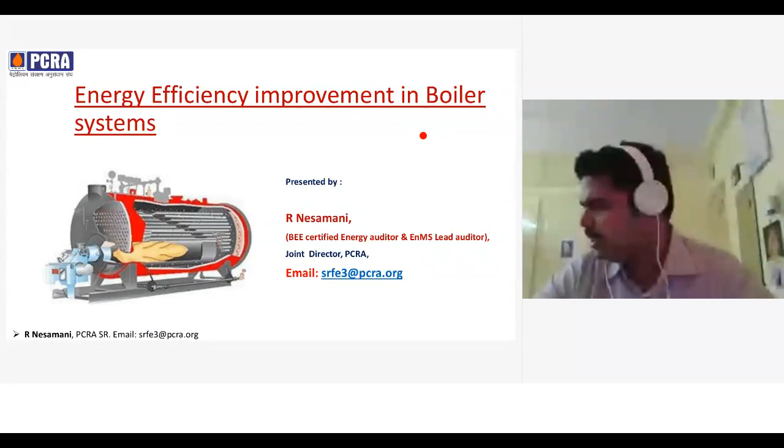So this is, I hope my screen is visible fully. Yes, sir, we can see your slide. Okay, thank you, sir. I have given an introduction about myself. I'm Nesamani, Joint Director in PCRA Chennai. We'll move on to the next slide.

This is the flow of the webinar. It will be like introduction of PCRA, we'll see about the boiler and its types, boiler system energy audit, what is the approach and what are the tools we will be using for audit, performance assessment of boiler systems and losses, factors affecting the boiler efficiency, and the energy efficiency improvements action plans with case studies.

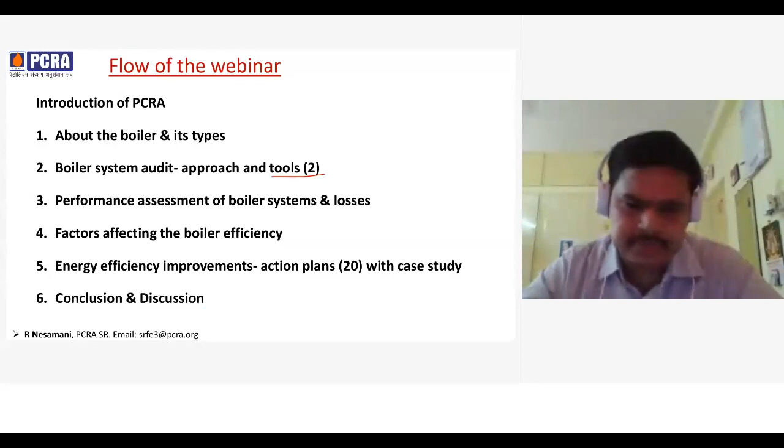This is the flow of the introduction about PCRA. Our vision is to become a center of excellence for energy conservation.

Actions towards achieving our vision include conducting trainings to industries on energy conservation techniques, and we have been conducting energy audits for industries at all levels, starting from PAT audits for designated consumers to MSME audits. We have been conducting audits.

We have conducted more than 10,000 energy audits till date, and we provide consultancy to implement energy management system ISO 50001 for industries to keep continual improvement in energy performance.

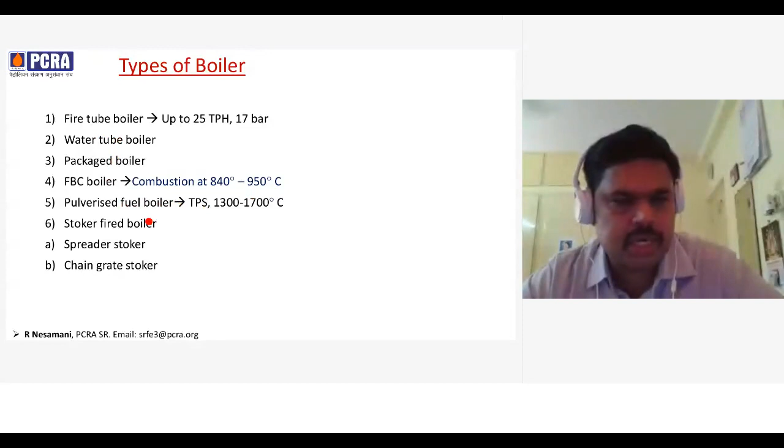Types of boiler - we have various types of boiler as per its pressure and applications. We have many types like fire tube boiler and water tube boiler, packaged boiler, FBC, and pulverized fuel boiler, which is mostly used in thermal power plants at high temperatures. And stoker fired boiler has two types, spreader stoker and chain grate stoker.

So the second topic is how to do an energy audit of a boiler system - what is the approach and what are the tools we will be using during the audit.

The audit approach is: first, if you go to any industry, we have to calculate the thermal baseline for the plant or industry, in terms of specific energy consumption - how much thermal energy they are using to produce 1 metric ton of the product output. That we have to calculate and find, so that will be the baseline specific energy consumption.

After that, we have to compare that baseline with the benchmark baseline for the applicable industry or process wise.

For example, let's take a rice mill. There may be having some 1000 kilocalories per metric ton of rice product. So that we have to compare with other industries, so that we can know what is our status - whether we are lagging or if there is any scope of improvement. That we have to find out.

Third, we have to study the existing energy consumption pattern, to find the avoidable energy losses in the boiler and steam systems. Fourth, as per the findings, we have to list down the action plans to improve the SEC.

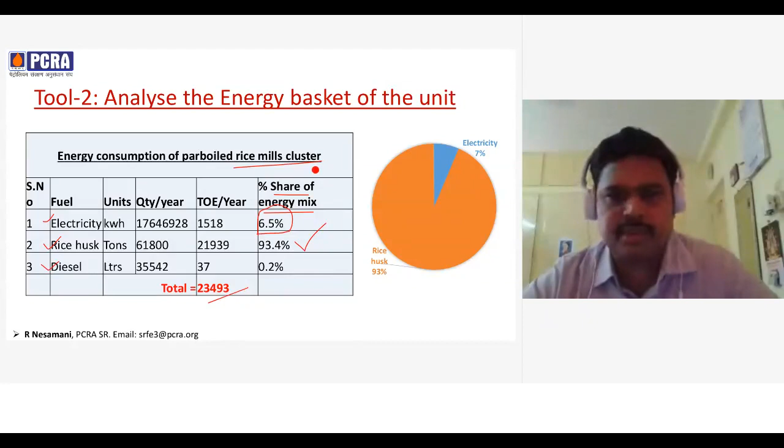The energy manager of the plant, his main concern shall be to improve the overall efficiency so that the fuel cost, consumption cost comes down, and specific energy consumption comes down.

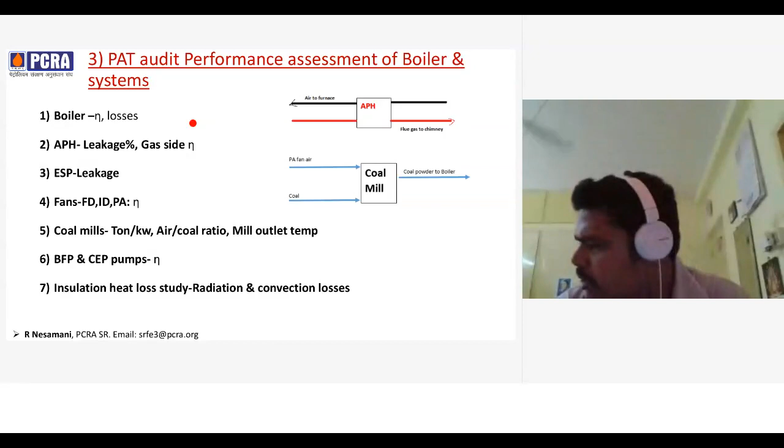If I am going too fast, or if I am not audible, Sarath, please call me or announce me, okay? There was a suggestion from a participant asking if you could please slow down a little bit. Sure, that's what I also felt.

So third is PAT audit - performance assessment of boilers and systems. This is a simple introduction. We'll briefly elaborate on how to do a performance assessment of boilers in case of PAT audit; normally we've been doing the same thing. What are the things we'll be doing relevant to boiler systems? For the main boiler, efficiency calculation and finding its losses - I will explain later. For the air preheater, we have to find leakage percentage and gas side efficiency. So how do we do this?

This is an APH (air preheater). Flue gas enters one side and exits to the chimney. On one side, air is entering and taking heat from the flue gas, then exiting, going to the furnace. We have to note down the oxygen percentage in the flue gas before and after the APH. If the oxygen percentage has increased between these 2 points, it means some air has entered the flue gas path from the airline. Why does this happen? Because the airline is at high pressure, and this line is in vacuum, meaning lesser pressure. Because of that, and also due to various reasons like seals damaging and other reasons, leakage happens. We have to calculate that leakage percentage using a formula: O2 percentage divided by 21 minus O2. That is the formula we have to use.

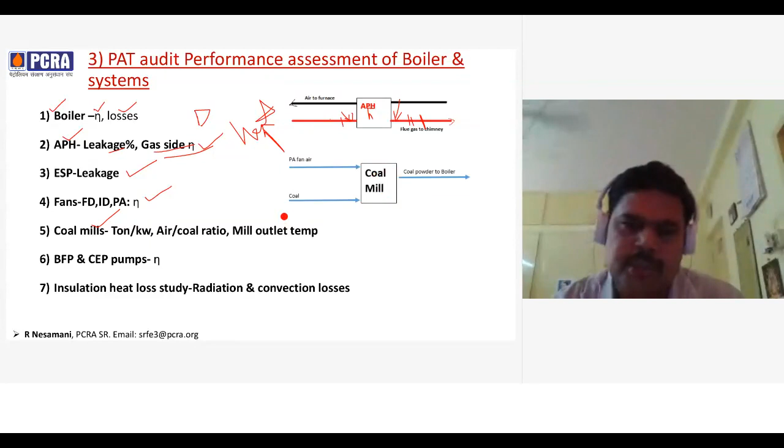For coal mills, we have to find — this is a coal mill. Air is supplied to the coal mill to carry the coal powder. The coal is supplied to the coal mill and crushed so that coal powder forms. That coal powder goes to the boiler. This is the simple process of a coal mill.

What we have to find is how much ton of coal is transported per unit of energy consumption — how much power the coal mill consumes per ton of coal. Second is the air-coal ratio: how much air is required to transport 1 unit of coal. That we have to find out.

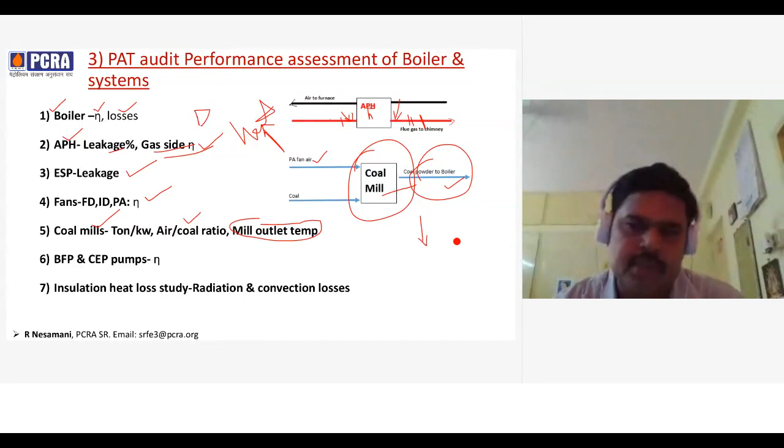Third important point is coal mill temperature. The temperature at the exit of the coal mill needs to be monitored regularly, because if it reduces, we are sending colder air to the boiler furnace, thereby the heat rate will increase and the efficiency will come down. So we need to keep an eye on coal outlet temperature and keep it as per the design temperature.

Sixth point is about boiler feed pump and condensate extraction pump efficiency, because this plays a major role in boiler system audit. Seventh is insulation heat loss study. Because of lack of insulation in boiler and steam piping surfaces, there will be radiation and convection losses that we have to study using a thermal imager. We will see these one by one.

So what is the procedure to evaluate boiler efficiency? One is the direct method and second is the indirect method.

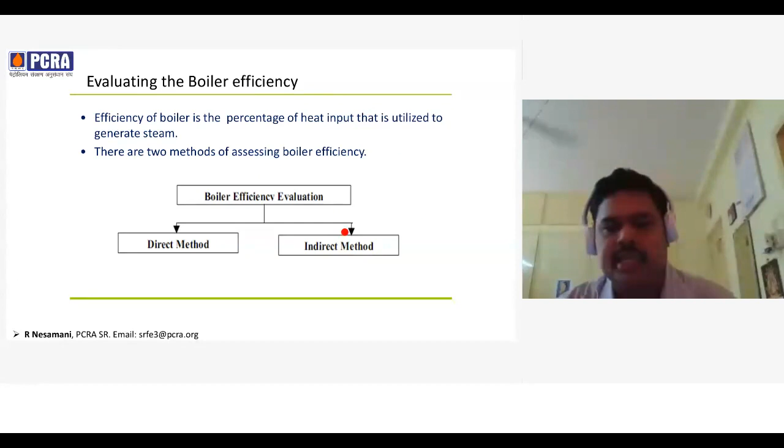Direct method is output divided by input. Input is given in the form of fuel, so mass flow rate multiplied by GCV will give the input to the boiler. The output is steam — steam's enthalpy minus enthalpy of the feed water, which will give the output. This will give the efficiency of the boiler unit.

But the problem with this method is even a small error in any measurement will end up with a high deviation in efficiency calculation. Because of that, we don't use this direct method. We normally use, as per the standard PTC 4.0, it is mandated to use an indirect method, that is a heat loss method. We'll see that.

This is for the boiler — fuel and air is given as input and flue gas is going out to the chimney. What are the losses? One is dry flue gas loss, hydrogen loss, moisture in fuel loss, and moisture in air loss. This is because hydrogen combines with oxygen to form water. That water, along with this moisture, will get heat of combustion from inside the boiler and get converted to water vapor. So it consumes energy from the furnace, absorbing energy and wasting useful heat.

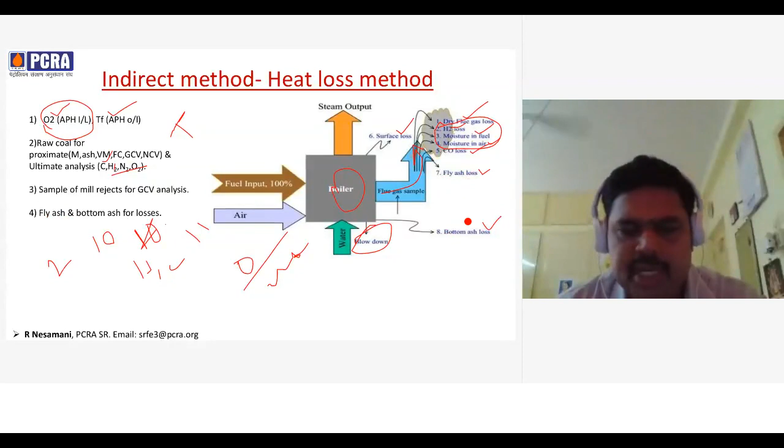From that, we have to calculate how much flue gas is also flowing, mass flow rate of the flue gas. That we will be using in the formula. And we have to take raw coal for proximate analysis. From proximate analysis using formulas, we will calculate ultimate analysis, meaning how much carbon, hydrogen is available in the fuel. Third is a sample of coal mill rejects for GCV analysis, so that we can find the loss due to coal rejection. And fourth is fly ash and bottom ash losses. We have to collect the sample and measure the GCV. Thereby, we will find how much energy is lost in ash.

So one point of concern is that in flue gases, which data need to be taken - oxygen or CO2? Using CO2 also you can find the excess air, but it is preferable to take an oxygen reading. The reason is that flue gas contains oxygen, CO2, carbon monoxide in very ppm level, and SO2. But if you see the correlation between oxygen and excess air, as the excess air increases, oxygen also increases proportionally. But in case of CO2, as the excess air increases, the CO2 is reducing, not exactly proportionally - a little deviation is there. For example, for LDO, if excess air is increased from 2 to 10%, it causes O2 in flue gas to increase by a factor of 5. But the CO2 drops by only 10%. So because of that, it is preferable to use an O2 reading for finding excess air. Also oxygen percentage is less sensitive to variations in the chemical compounds of the fuel, but CO2 in the flue gases depends on the carbon percentage in the fuel. So O2 is not affected by the carbon content in the fuel. Because of these reasons, we prefer to take an oxygen reading to find the excess air.

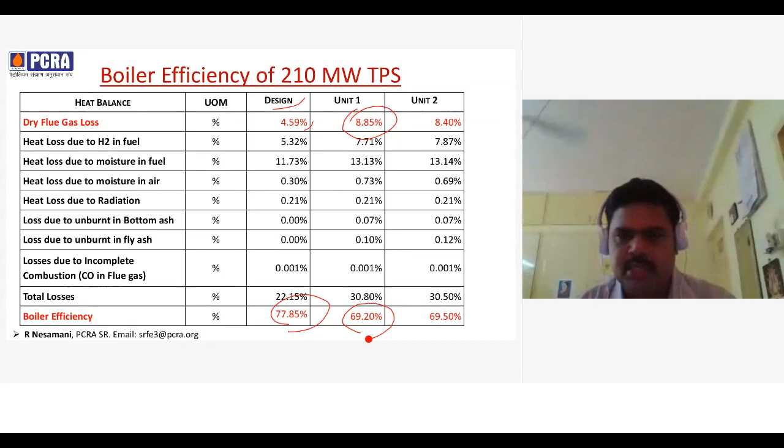So we'll discuss the losses in detail. The first loss is dry flue gas loss. The causes are high excess air and high flue gas temperature, meaning stack temperature.

First we'll look at high excess air. We've discussed using an oxygen measurement in the flue gas using this formula, which we'll calculate. There's a typo error, so it should be O2%.

First we have to find the theoretical air, that is the stoichiometric air. For example, for coal, 10.7 kg of air is required per 1 kg of fuel. This will vary as per the various types of coal and their specifications of carbon and hydrogen content. But even if you supply this optimum air, is it enough?

No, it's not enough, because inside the furnace, complete combustion cannot happen this way. Each carbon particle will not mix with an oxygen particle exactly. So we need to supply a little bit of excess air so that complete combustion takes place.

So we have to find the optimum excess air levels for each fuel. For example, for coal, the optimum excess air is 15 to 20%. This means if you supply almost 12 kg of air per 1 kg of fuel, it will give very good combustion. Now let's look at this drawing which we discussed.

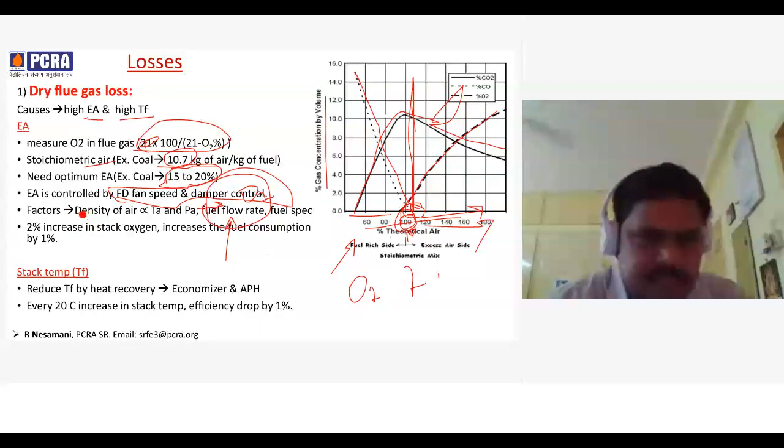If you see, the factors which affect excess air include air density, and temperature of air is inversely proportional to density. If the temperature of air increases, the density will reduce. If we do the boiler tuning at 6 a.m. in the morning for the evening, what happens?

Temperature will increase, density will come down, so the airflow will come down. So it will go into this zone, a lack-of-combustion zone. This will have a big effect on boiler efficiency.

Other factors like fuel flow rate and fuel specification will also affect this, because if the fuel flow rate varies, we need to supply more or less air. Fuel specification also affects excess air requirements. A 2% increase in stack oxygen increases fuel consumption by 1%.

So we have to be very careful in finding and setting the excess air. The second reason for dry flue gas loss is stack temperature.

If you reduce the stack temperature by using heat recovery options like an economizer and APH, the efficiency of the system will increase. We will see in detail how every 20 degree Celsius increase in stack temperature will drop efficiency by 1%.

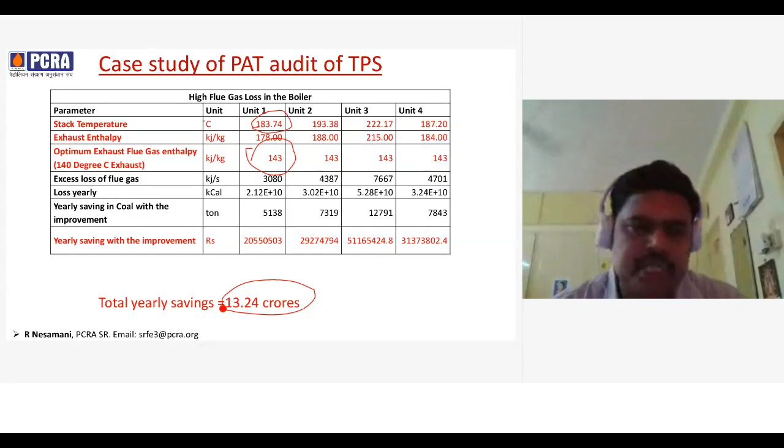Second is hydrogen loss or enthalpy loss. The causes are hydrogen in fuel, moisture in fuel, and moisture in supplied air. Hydrogen in fuel mixes with oxygen to form water, and that water along with moisture takes heat of combustion to form steam, which is a loss. Hydrogen is very high in natural gas, so this loss is normally very high when using natural gas as fuel. It is almost 11% for natural gas and 7% for fuel oil.

So how to prevent this loss? We can control the flue gas temperature, but it will have a very small effect on this loss. Another method is using a condensing heat exchanger, that means a condensing economizer, which can reduce this loss appreciably.

Third is unburnt loss. This is because of lack of combustion or lack of oxygen, where carbon mixes with oxygen to form carbon monoxide, which releases lesser energy than the actual energy. The reasons include high primary air flow, fuel size, and low air supply.

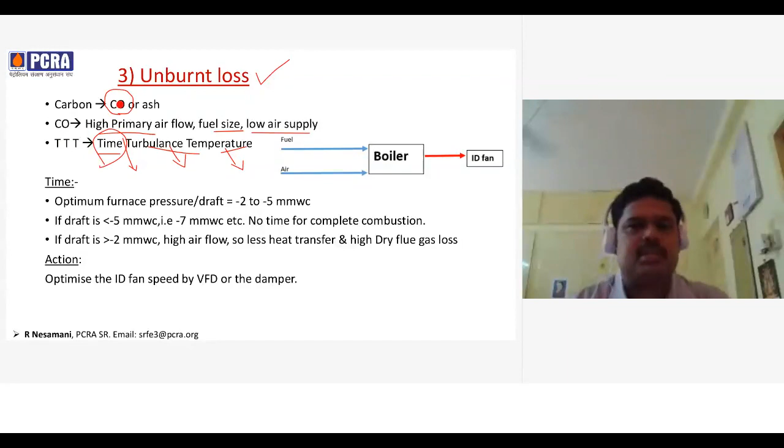For example, fuel and air enter the boiler and exit through the ID fan. The ID fan's job is to maintain draft, meaning pressure inside the furnace. The optimum draft is -2 to -5 mm of water column. If the draft is very low, meaning the pressure is lower than this optimum level, the ID fan is running at very high speed, pulling the flue gases very fast. So the time given for complete combustion of fuel is reduced, causing formation of carbon monoxide.

If the draft is very high, meaning the ID fan is rotating very slowly, a high airflow will be there causing excess air, so heat transfer will be low and dry flue gas loss will increase. So it should be neither too high nor too low; we have to maintain the optimum furnace draft.

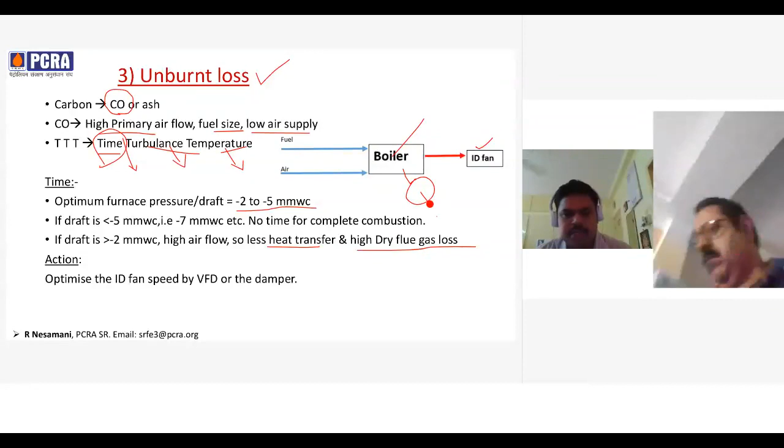What do we have to do? We have to have a pressure gauge in the furnace. The operator shall continuously monitor the pressure gauge and adjust the ID fan. If the ID fan has a VFD, it is very good; otherwise, damper control can also be done so that the draft is maintained.

Fourth loss is about radiation and convection. This is mentioned as a percentage of the rating, percentage at full rating. At fully loaded boiler, it will have a very low percentage, maybe from 1%, but as the boiler load reduces, it can go up to 6%. So it is always suggested to operate the boiler at 70 to 80%, because the boiler will have its highest efficiency at 2/3 of its capacity. So that we have to note down.

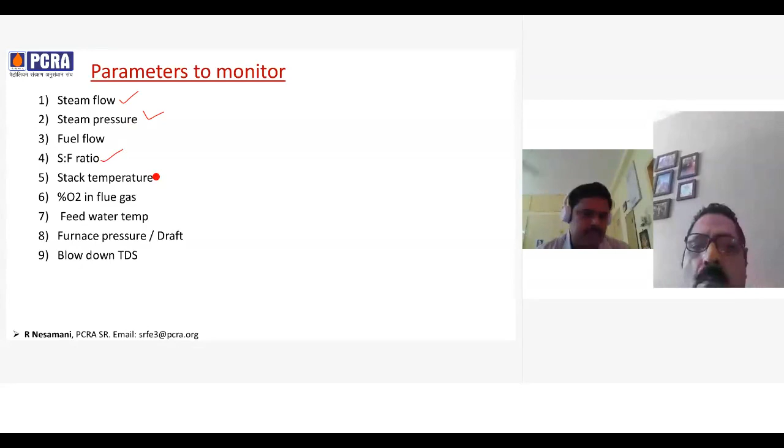So what are the parameters to monitor while operating a boiler for efficiency? One is steam flow, steam pressure, fuel flow, and evaporation ratio, stack temperature, oxygen in flue gas, feed water temperature, furnace draft, and the blow down TDS.

Fourth is the factors affecting boiler efficiency. One is stack temperature. If the stack temperature increases, the efficiency will go down, because it carries away useful heat from the furnace.

Second, we have to decide whether the efficiency calculations are as per GCV or NCV of the fuel, because that we have to finalize. Normally in a PG test, whatever they have used, whether GCV or NCV, we have to find out and accordingly use the same thing. Otherwise there will be deviation in the efficiency, which will again confuse us.

Third is fuel specification. Initially, when commissioning the boiler, they found the fuel specification was this much, and as per that they set the excess air levels and theoretical air requirement. But is it enough? If you see, it is not enough, because if hydrogen increases, the loss will increase. So the hydrogen to carbon ratio shall be lesser, so that the efficiency improves.

And the fourth point is the excess air levels, which is very important for limiting the dry flue gas loss.

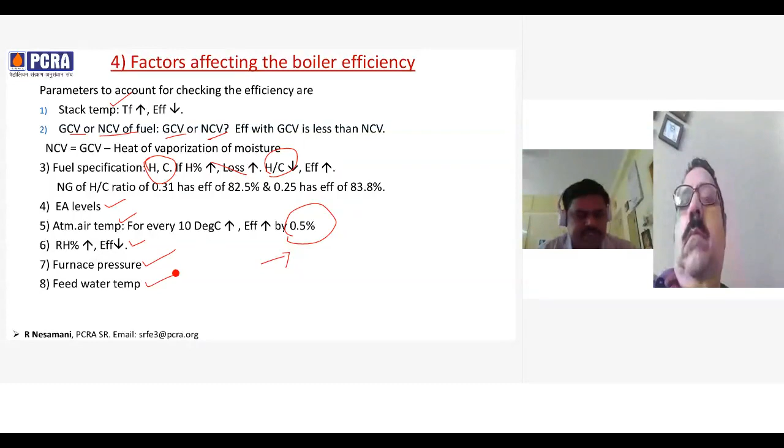So we will move on to the energy efficiency improvements and action plans with case studies.

First point is excess air control. We have discussed in earlier slides about the effect of excess air on dry flue gas loss, and how we have to control the excess air percentage. How to control? One way is adjusting the FD fan damper, but that will not be a permanent solution, because fuel consumption may increase or reduce, fuel properties can vary, and the temperature of the air varies, so the air volume required needs to be varied. So we suggest going for an oxygen trim control.

This is one of the control mechanisms, in which the flue gas analyzer is installed online continuously. The O2 level is measured online, and using the O2 trim control, it takes the data from the O2 in the flue gas, and as per the O2 level, it will adjust the fuel and air.

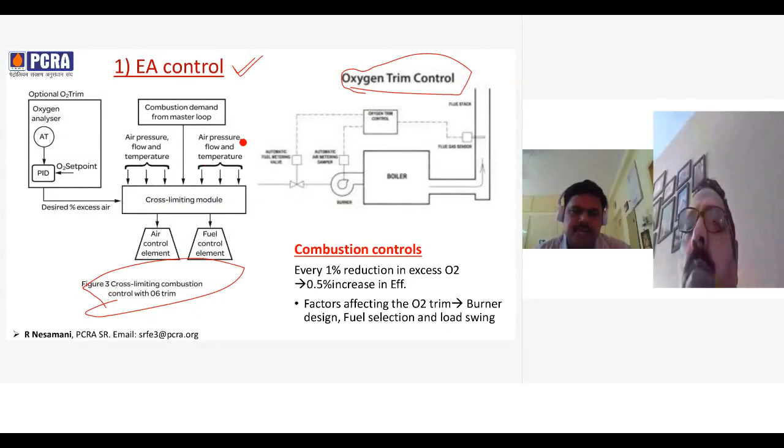Thereby, it maintains proper optimum excess air. Another control is cross-limiting combustion control. This also takes the flue gas analyzer data, and air flow and fuel flow are controlled more precisely, because it will not allow the burner to go into incomplete combustion, meaning lack of oxygen will not be there. It will maintain a proper mixture, thereby we can have optimum excess air control. A 1% reduction in excess air will give a 0.5% increase in efficiency.

What are the factors affecting the O2 trim? Burner design, fuel selection, and load swing. These are the factors which will affect the excess air levels and oxygen in flue gas.

This is one case study from a BEE Energy Audit of a Pali Textile Cluster. The cluster was using boilers of various sizes from 1 to 4 TPH. Fuel was residual pet coke from Reliance Industries. They installed O2 trim control. Initially the O2 level was 15%, but after that they could achieve an O2 of 8%, meaning a reduction in the excess air.

So excess air supply came down to 61%. Initially it was 250%. After implementation of the control, it was only 61%. Thereby, they could achieve a fuel saving of 13 kg per hour. Total investment was 3 lakhs and the payback was 5 months.

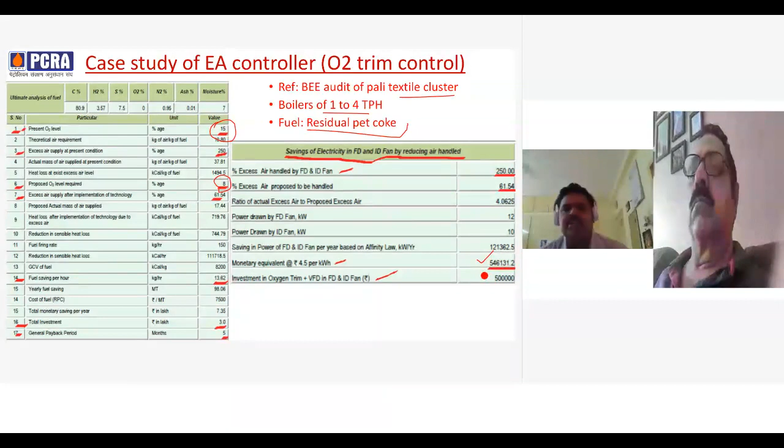And there's another saving, because if you reduce the excess air, the FD fan load will come down. Both FD and ID fan loading will come down, so the power consumption has reduced in the FD and ID fans. Thereby they could achieve a saving of almost 5,46,000. The investment for controlling the FD and ID fans using a VFD was 5 lakh total, including the oxygen trim.

So the second action plan is reducing flue gas exit temperature. What is prohibiting us from having a lesser flue gas temperature is the acid dew point temperature of various fuels.

What happens is hydrogen in the fuel mixes with the oxygen in air to form water vapor, and sulfur in the fuel forms sulfur trioxide. These combine together to form sulfuric acid. When the temperature in the stack reduces to its dew point temperature, it becomes acid, and it forms on the path of the flue gas ducts, thereby corroding the flue gas ducts.

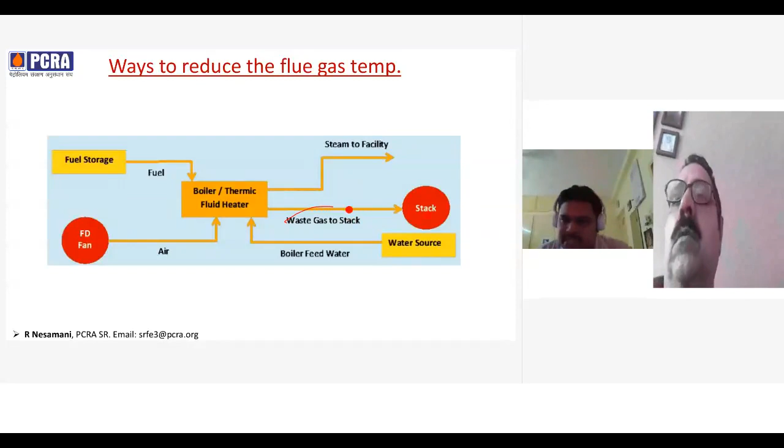This is the boiler without air preheater or economizer. The fuel and air comes and it goes to the stack without recovering any heat from the waste gas.

Thereby the boiler feed water temperature will increase, as well as the air temperature. You see, if you increase the feed water temperature by 6 degrees Celsius using an economizer, the fuel consumption will come down by 1%.

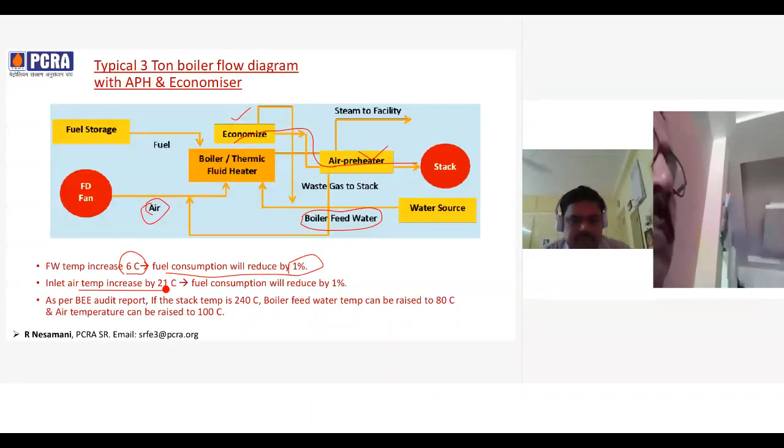Second, if inlet air temperature increases by 21 degrees Celsius, the fuel consumption will reduce by 1%. As per the BEE audit report, if the boiler stack temperature is 240 degrees Celsius, boiler feed water can be raised to 80 degrees Celsius, and the air temperature can be raised to 100 degrees Celsius.

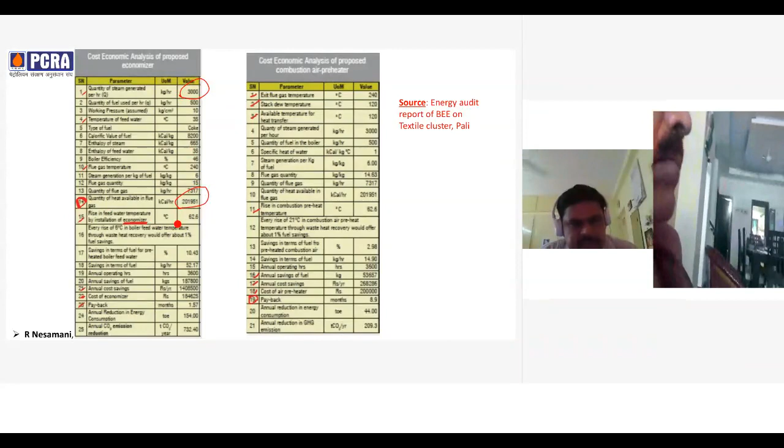This is a case study from the energy audit of BEE Textile Cluster, Pali. Initially an economizer was installed on a 3-ton boiler. The quantity of heat available in the flue gas was this much, and they could increase the feed water temperature by 62 degrees Celsius. Thereby they achieved a cost saving of almost 14 lakhs. Cost of the economizer was 1.6 lakhs, so the payback period was less than 2 months.

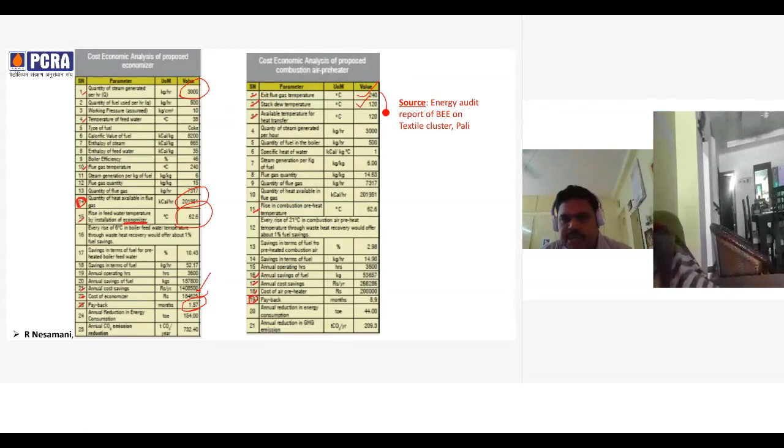This is about the air preheater. Initially the exit flue gas temperature was 240 degrees Celsius, but the acid dew point temperature was 120. So they tried to extract heat from the flue gas so that the temperature should come down near to 120. They used an air preheater for that.

The annual fuel savings achieved was 53,000, and they achieved a cost saving of almost 2.6 lakhs. The payback was less than 9 months. This is the case study we have discussed - the air preheater installed at Simandhar Fab Tex Pvt Ltd, Pali.

There is a YouTube video also explaining how the technique works and what it is. We can go through it after this, when you are free.

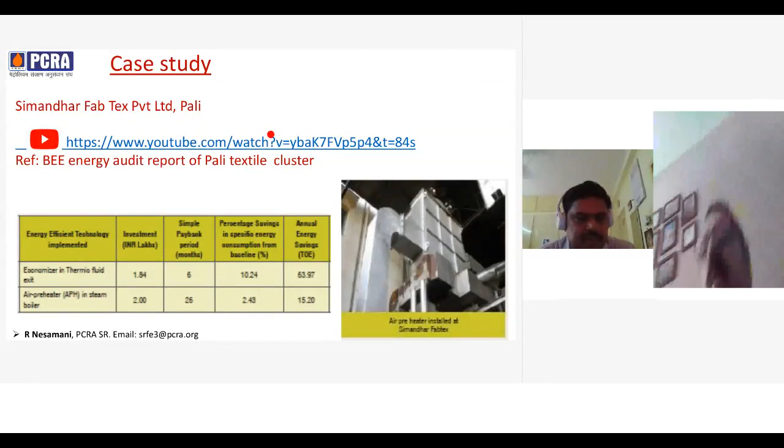So the second option is that we reduce the flue gas temperature using an economizer and air preheater to a certain point, but we cannot reduce it beyond its acid dew point temperature. For that we can consider installing a condensing economizer. This is not famous among industries, but it has come up in foreign countries, and in India too - in Pune, a few industries have installed it.

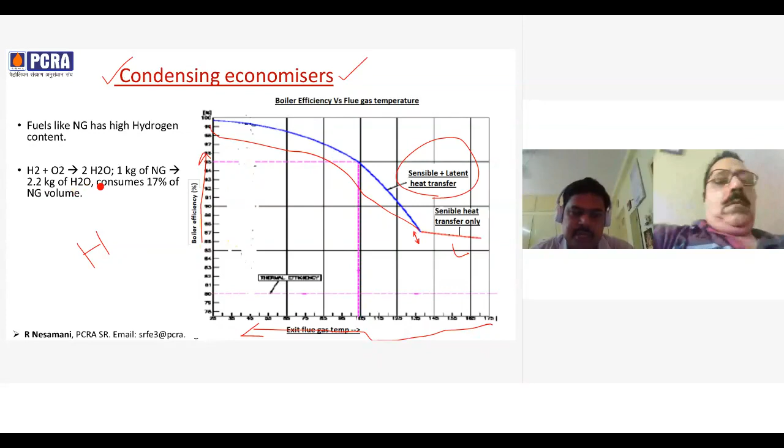If you see, hydrogen and oxygen form H2O, particularly in natural gas which has high hydrogen content. 1 kg of natural gas will give 2.2 kg of water vapor, by consuming 17% of the supplied natural gas volume. If you supply 100 cubic meters of natural gas to a furnace, almost 17 cubic meters of natural gas is consumed for converting water to water vapor. So that we have to recover back using the condensing economizer.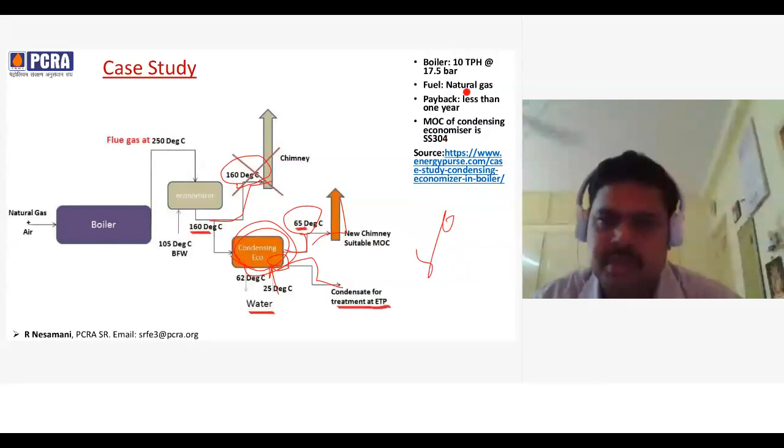The material selection of this condensing economizer shall be as per the fuel composition, and the chimney material also shall be carefully selected, otherwise corrosion will happen. I took this from this website, you can go through it after this. In this case the material of construction was SS304, and they could achieve payback in less than a year.

The boiler capacity was a 10-ton boiler at 17 bar. This is temperature versus efficiency - as flue gas temperature reduces, efficiency improves because we are recovering heat being wasted in the flue gas. Only the boiler will have an efficiency of 79 to 80%. With the economizer, efficiency can go to 84%. If you install a further condensing economizer, you can reach efficiency of 92%. The stack temperature will also come down to 50 to 65 degrees Celsius.

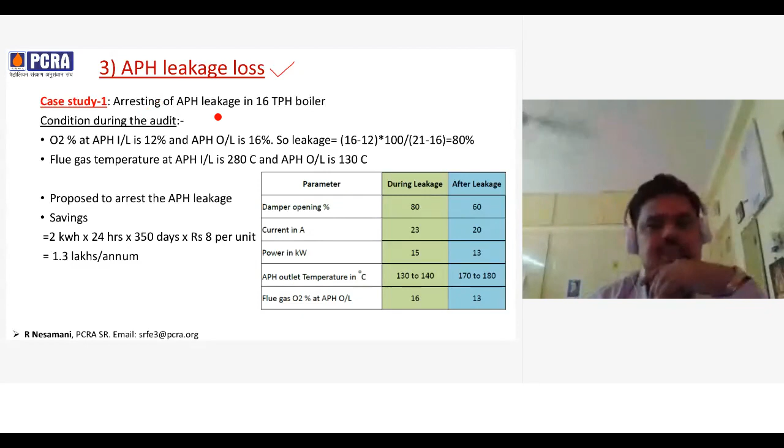So the third loss is about APH leakage loss. We have elaborated on how to calculate the leakage percentage and what the effects are of APH leakage. This is a case study about a 16-ton boiler where the leakage percentage was calculated as 80% using the formula.

So the flue gas temperature at APH inlet is 280 degrees Celsius and the outlet is 130. This is not the actual temperature - we have to adjust as per the leakage percentage. If you adjust it, the actual outlet temperature may be 140, thereby increasing the dry flue gas losses. So what we have to do is arrest the leakage.

If after arresting the leakage you see the fan power consumption - during leakage it was 15 kilowatt, and after arresting leakage it was 13 kilowatt. Thereby 2 kilowatt saving was achieved, almost 1.3 lakhs per annum. They could achieve this saving.

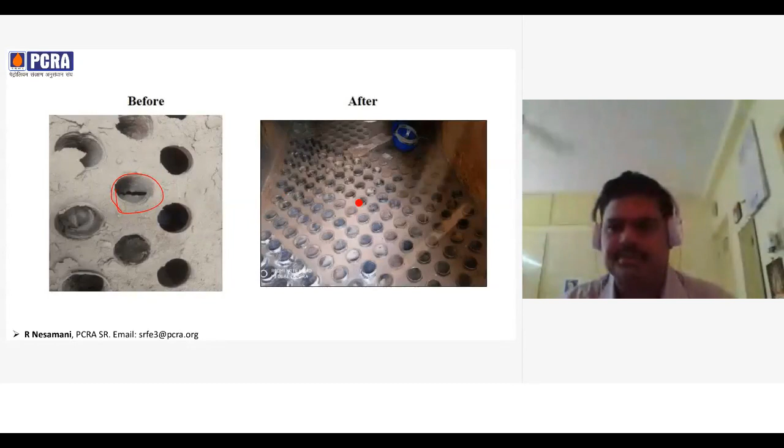This is the picture - if you see this, it's a normal small boiler. The APH tubes were broken like this, so they have replaced many tubes, thereby arresting the APH leakage. This is the impact of leakage in the PAT audit of a thermal power plant.

So the fourth point is removing unnecessary pressure drops. We have to go through the steam lines and pumping systems and find whether there are any unnecessary pressure drops existing in the system. This is one case study.

One is the drum level - boiler drum level control by BFP scoop or VFD. In big power plants of 210 megawatt, BFP scoop was used. In small plants, they use a VFD. Both can be used to control drum level. During one of the audits, we observed this schematic diagram - after BFP, the feed water goes to economizer through HP heaters, and then it goes to the boiler drum. The drum level is maintained by the scoop by adjusting it.

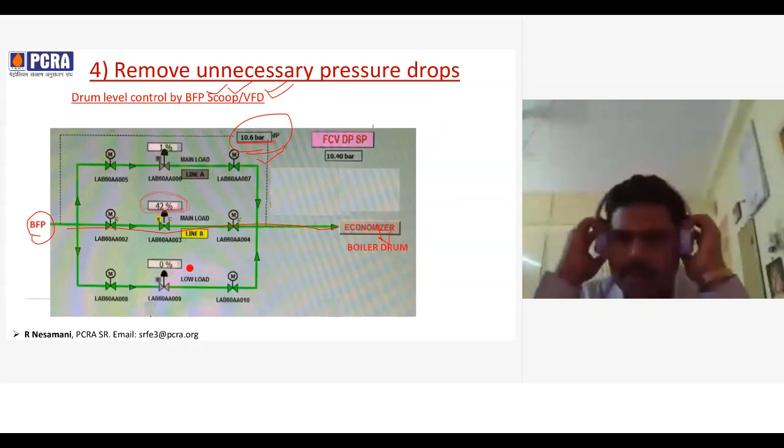At normal load conditions, there will not be any problem. Only during huge load fluctuations will controlling the drum level be very difficult. For that also there is a solution - they can use a 3-element control. It is a control mechanism which uses steam flow, water flow, and drum level, and accordingly adjusts the VFD or scoop, thereby controlling the drum level efficiently.

So if they open these valves fully, what happens? The dP will come down to zero, thereby the excess energy being wasted in BFP will come down. You see this - each BFP of both units can have a saving of almost 170 kilowatt, which will have a yearly saving of almost 72 lakhs per annum. Like that, we have to check normal pumps also, whether any unnecessary obstruction is there or not.

The fifth point is about condensate recovery. Feed water is nothing but condensate and makeup water. It's not possible to recover only if contaminated. We suggest recovering all the condensate.

It's not suggested only if the condensate is contaminated, it should not be recovered. Still, we can recover the flash steam; the condensate itself should not be recovered. So what is the purpose of recovering the condensate?

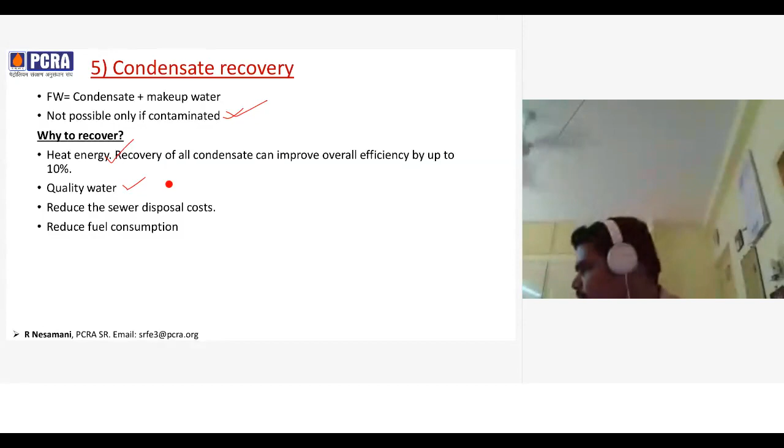One is it has heat energy, so that it will reduce fuel consumption. Second, it's very good quality water. Condensate is treated and has less impurity, so it is very good quality water. If you don't recover it, you have to add makeup water, which will increase the cost of water treatment.

Third, it will reduce the sewer disposal cost, because if you don't recover it, it will go to sewer and we have to incur expenditure on disposal. And finally, it will reduce fuel consumption.

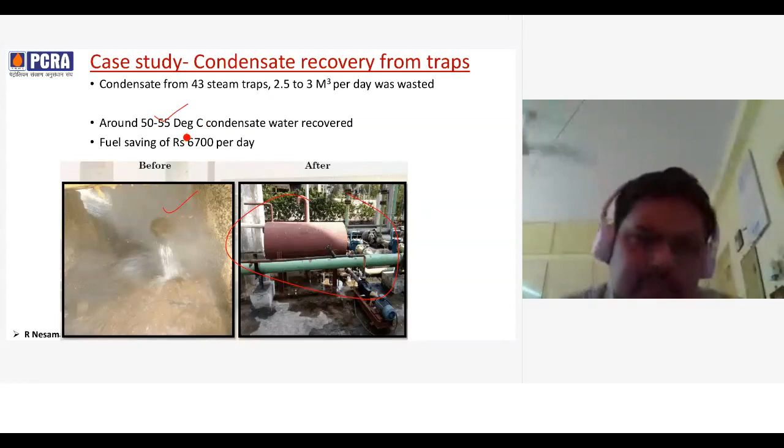This is one case study of a plant where condensate from various steam traps, almost 3 cubic meters per day, was wasted like this before. But after that, they implemented a condensate recovery system with pumps and tanks and all. They could achieve a recovery at 50 degrees Celsius. Fuel saving of almost 6,700 per day was achieved. In addition, they saved on water pumping cost as well as chemical treatment cost.

This is a case study of a BEE Energy Audit at a Pali textile sector. There they implemented this condensate recovery system for small boilers as well, achieving almost 3 lakh rupees of energy savings. Recovery was almost 18%.

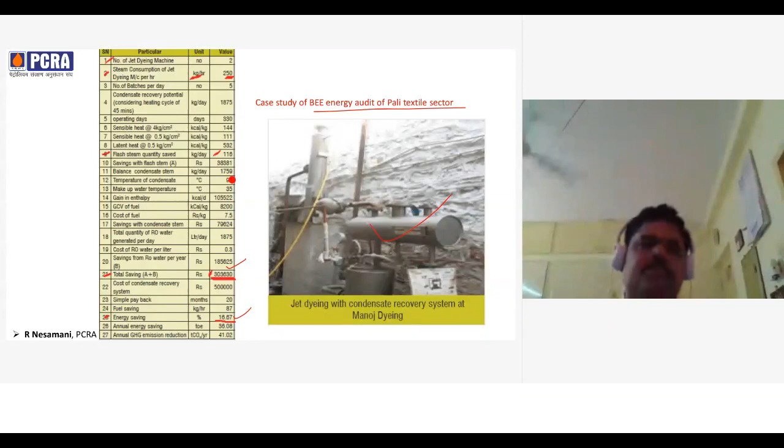Sixth point is about flash steam recovery. So what is flash steam? The technical explanation is this is a TS diagram of water and vapor. What happens?

Water, if you start inputting heat, the temperature will increase at constant pressure, and this is a saturated liquid point. After that, further addition of heat will make the water start boiling at 100 degrees Celsius. It will absorb a huge latent heat, thereby reaching a saturated vapor state. After further addition of heat, it will make the water into superheated steam.

This happens for each pressure. For example, let's take atmospheric pressure, this is at 7 bar. At 7 bar it has a heat content, enthalpy, of 721 kilojoules.

If it is suddenly supplied to a flash vessel, a simple tank, what happens? The tank is at atmospheric pressure, so at atmospheric pressure the heat content is only 419. So the difference, 721 minus 419, equals 302.

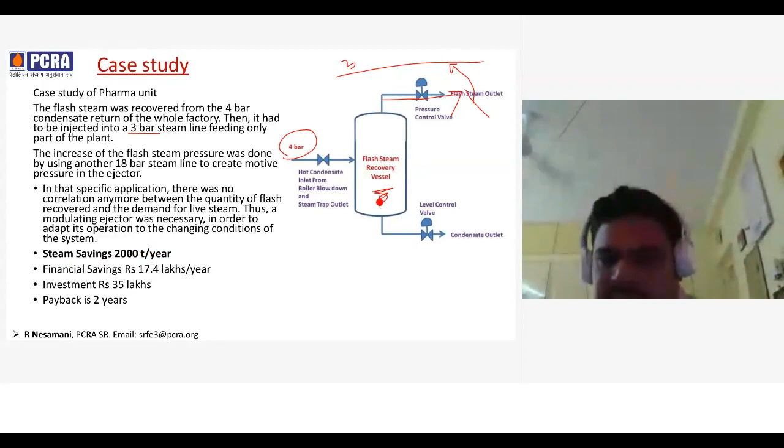The bottom will be with condensate water that can be recovered again for feed water or some other process.

Seventh part is on energy loss due to improper deaeration of feed water. Deaeration is the process of removing oxygen and other gases from the feed water. That is the process, meaning how it is achieved.

The feed water is in the deaeration tank, and steam at low pressure is given at the bottom of the tank. Thereby, the steam will heat up the water, and the oxygen and other gases will be removed from the water.

That oxygen and air shall be removed from the tank using an air vent and vacuum pump at the top. But this air vent will not remove the air exactly; it will anyway remove the steam also, meaning steam also will be lost during the process.

That we need to monitor, because in an optimized condition, 0.5 to 1% of steam loss is acceptable. If it is more than that, then we need to correct it. When the makeup water increases, the vent loss also will increase, because the makeup water will bring more oxygen, so the vent loss will increase.

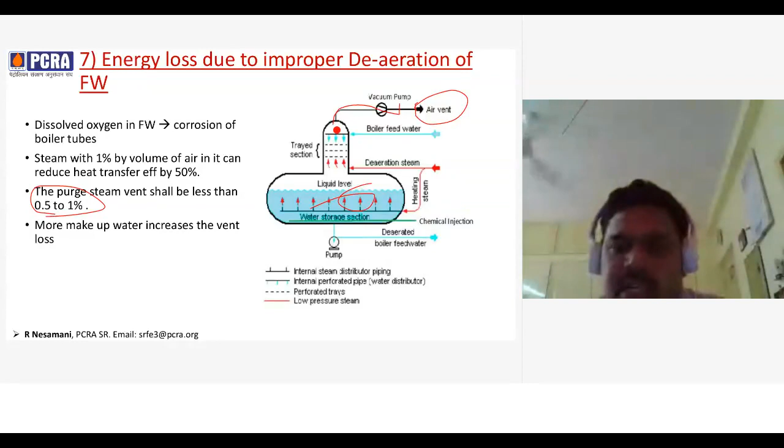Eighth is a blowdown loss. In a boiler, water after absorbing heat is converted to steam. If makeup water is increasing, we don't recover much condensate and we are adding more makeup water. The dissolved solids in the makeup water also increase, causing the blowdown percentage to increase. It is a loss, because the blowdown water has heat content. During blowdown, we can't recover that heat because it contains impurities. So it is a loss of heat energy in the system. But we can optimize the percentage of blowdown.

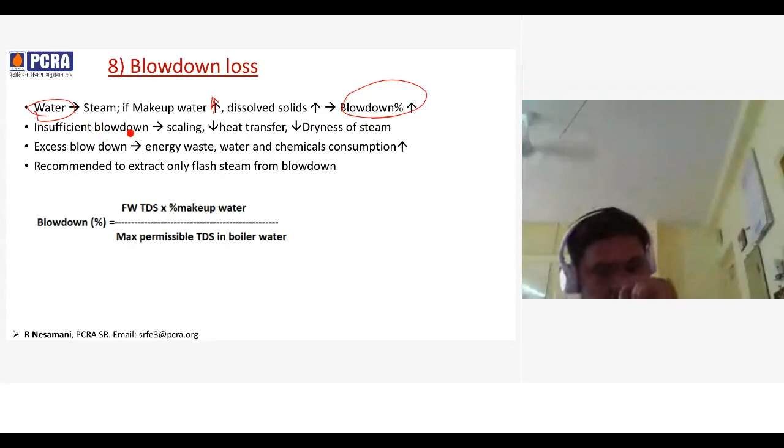That's what we suggest. One is insufficient blowdown. If you reduce the blowdown, what will happen? The impurities will be carried inside the boiler tubes, and scaling formation will happen, and the heat transfer will come down. Because of that, the dryness fraction of steam also will go down, meaning steam will have moisture particles. It will further damage the equipment in the process.

If the blowdown is very high, what will happen? It's a clear energy waste, and water and chemical consumption for water treatment will increase. So we have to optimize the blowdown.

We have to find the blowdown percentage using this formula. Feed water TDS, how much it shall be - for example, boilers of 12 bar pressure can have a feed water TDS of 3000 ppm. We need to take that info from the boiler OEM. And the makeup water percentage divided by maximum TDS in boiler water - this is 3000 - we need to calculate using this formula, to find what is the present blowdown percentage. It is suggested to extract only the flash steam from blowdown because blowdown has impurities, so it is not suggested to use that for feed water or any other purpose.

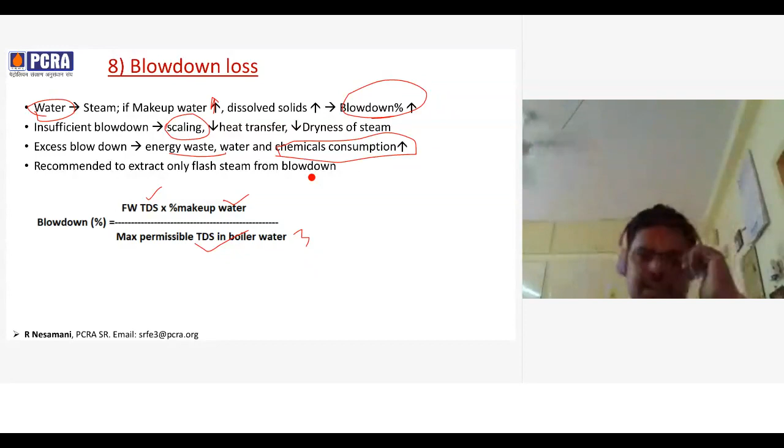So this is the methods of blowdown. Blowdown happens from the boiler drum bottom as well as from the middle. The bottom blowdown purpose is to remove corrosion particles and mud-like dust impurities. The middle blowdown is to remove dissolved suspended solids. If it is not removed, it will carry over to the lines and corrode the control valves, and heat exchanger fouling also will happen.

So it is suggested to use an automatic blowdown control system. What it will do is keep on monitoring the TDS levels of the boiler water, and accordingly, as per the requirement, it will blow down the water. So it will reduce the boiler losses by 0.5%.

Ninth is steam trap losses. Approximately 20% of the steam leaving a boiler is lost via leaking traps. We have to assess the trap system for two things: whether it is working correctly or not, and if not, whether it has failed in the open position or closed position. If it is failed open, continuously steam will be blowing out like this.

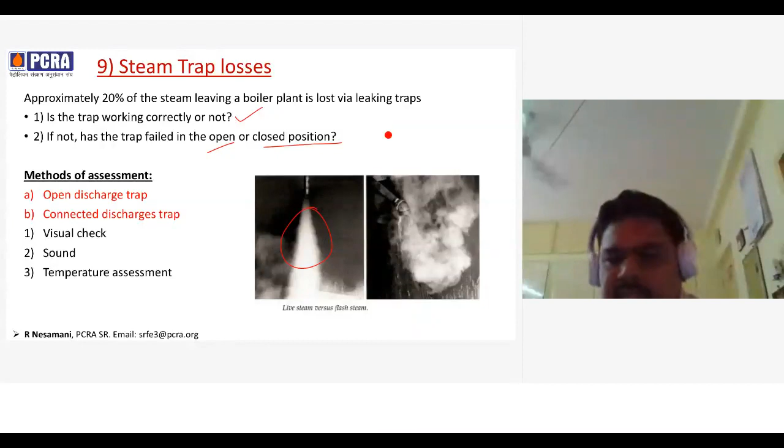If it is failed closed, that means blockage - it will not allow any steam. We may think that it is working fine, but it is sending back the condensate into the steam line, causing water hammer, and it will damage nearby traps also because of high loading on the traps.

So how to check the steam traps? Two methods are there. One is an open discharge trap and another is a connected discharge trap. If the trap is in open position, it is easy to check. If it is connected with some other line, like condensate recovery or anything, then it is a little bit tedious to check the performance of the trap.

If it is open, you see these two pictures - steam is coming out continuously, and here there's a little bit of steam. This is flash steam, which happens because of the condensate coming out at low pressure, from high pressure to low pressure. So if you see both traps, we can easily find that this one is leaking, meaning failed in open position. This is a normally working steam trap.

So if it is a closed connected discharge trap, what are the methods? One is a visual check through its glass. Second is using sound checking, and third is temperature assessment. First is the visual check of the trap - the trap will have a glass.

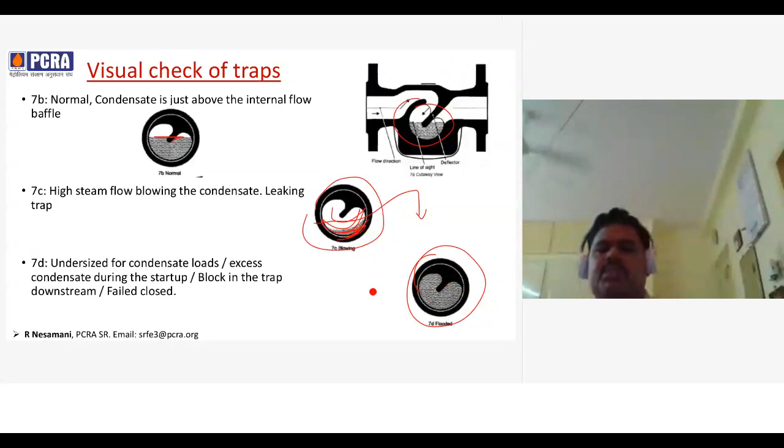And third is this status, like condensate is fully blocked. It means failed closed - the trap is in blocked condition, thereby condensate is filled in the trap, thereby it is not allowing a discharge.

So another method is listening to the sonic and ultrasonic sounds of the fluid flow using a stethoscope. That also will help find the damaged traps.

The third method is using temperature, but this will not give a reliable result because the temperature of the steam upstream of the trap - in downstream also steam can come out because of flash steam, which can come out at a lower temperature than upstream, but still it will not have a big difference. So this method is best used to determine the traps that are blocked.

If the trap is blocked, what happens? The upstream will have condensate, the downstream temperature will be very low, because nothing is coming out of the trap. So in that case we can use this temperature method, not in case of leaking steam.

So the 10th point is plugging steam leaks. If you go through the plant steam lines, you can find that there are many leaks coming out from valves and its joints. Those leaks shall be arrested. The energy loss from those leaks can be found using steam plume length.

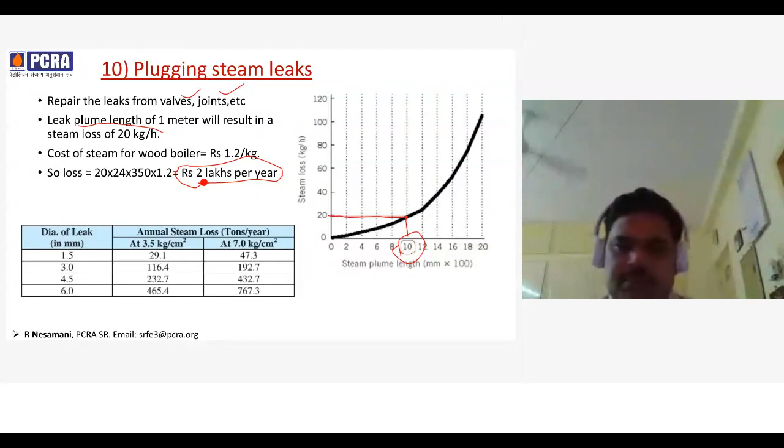So the 11th point is on steam distribution piping optimization. What are the parameters to note? One is the pipe size, its configuration, its insulation, and the support levels.

Pipe size - if the pipe size is reduced, what will happen? It will increase the velocity as well as the pressure drop also will increase. So the optimum velocity limits are: for superheated steam, 50 to 70 meter per second; for saturated steam, 30 to 40; for wet steam, 20 to 30 meter per second.

If the velocity has increased beyond these optimum velocities, what will happen? Noise will increase as well as erosion will take place. For small branches, the velocities suggested are 15 meter per second only.

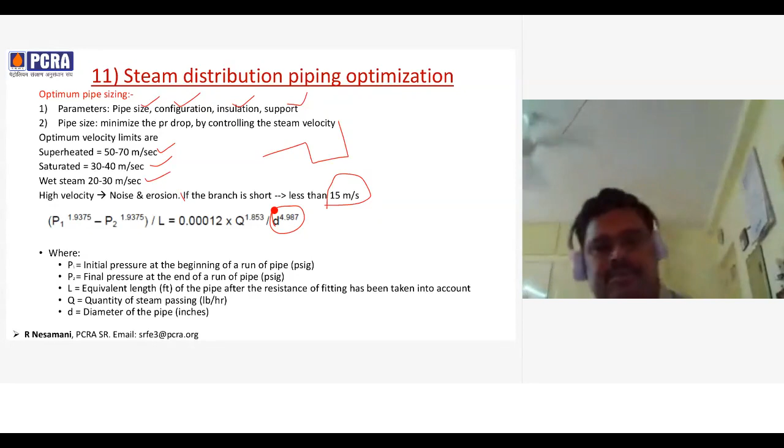Using this formula, we can find out what diameter is required, whether the diameter is enough for that flow or not. Flow we have, length we have, P1 and P2 is the initial pressure and final pressure - so we have all the data. The length shall be adjusted after taking into consideration its fittings and pressure loss. So using this formula, we can calculate the diameter, whether the pipe diameter is optimum or not.

So in steam piping, if the diameter is oversized, what happens? High capital cost, and its maintenance cost also high. Insulation cost and the surface heat loss cost also will increase. If the pipe size is low, it will have a high pressure drop, pumping energy will be more, and the leakage rate also will increase if there is any leakage.

So as well as in piping, what we have to do is isolate the redundant steam carrying pipe system. Suppose if any process is isolated long ago, but the steam line will be there as usual, steam will be supplied in this pipeline continuously - it should not be like that. We have to isolate this pipeline as far back as possible, so that heat loss and radiation loss can come down.

And fixing the steam leaks, which we have discussed, and monitor and quantify the steam process. We have discussed in tool 1 that a steam balancing diagram will help us find which process consumes more energy, and the losses also we can find out.

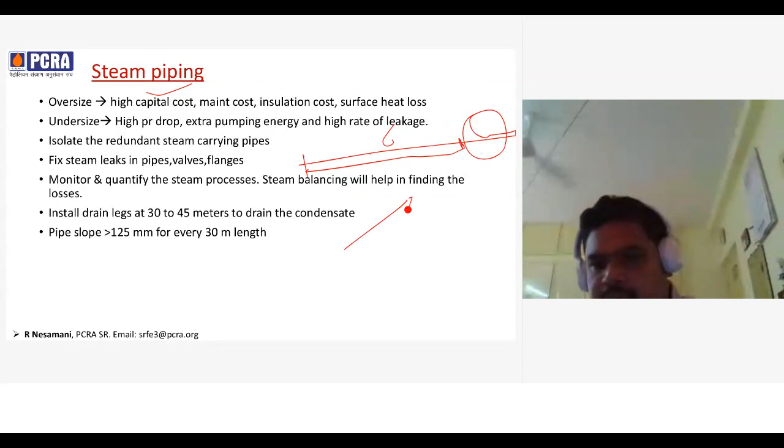In the optimum case, we have to install drain legs at 30 to 45 meters to drain the condensate. Because if the steamline carries condensate, what happens? The velocity of steam, let's say 50 meters per second - if water particles are there, they will also travel at the same velocity, going like a bullet. That water particle will damage the valve stems.

So if you see in steamlines, most of the valve stems will be leaking from this point. We may think the valve is faulty, but in actual case, the steamline has a water particle that was hitting continuously on the spindle of the valve. Thereby the gland and everything gets damaged and the leakage starts.

So finally, to remove this water particle, we have to use a moisture separator, or we can go for drain legs as per standard. Finally, the pipe slope - pipe slope shall be more than 125 mm for every 30 meters. This will also remove the condensate.

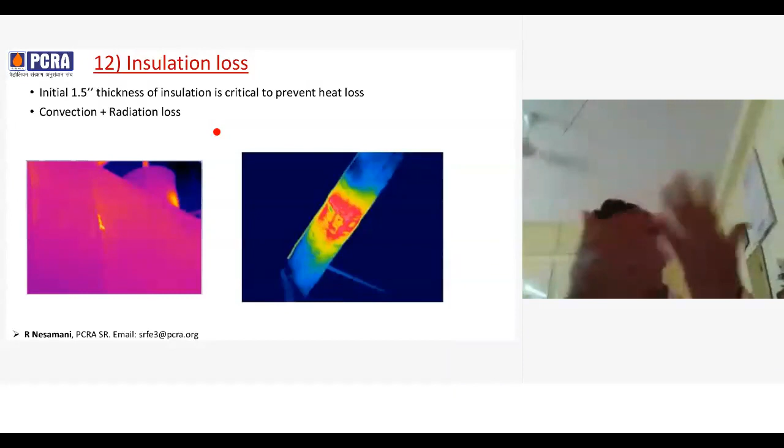The 12th point is insulation loss. We should have proper insulation on the boiler as well as the steam pipelines. We measure the insulation loss using a thermal imager. It works on the principle that anything above absolute zero temperature will emit electromagnetic radiation. That radiation, the camera catches that radiation picture, and it gives the temperature also.

This is a sample picture of thermal imaging from some of the audits. You can see the high red portion means very hot temperature, meaning insulation loss is there, and because of that the surface temperature is very hot. Wherever insulation loss is there, we have convection loss as well as radiation loss. We have to calculate using a formula based on surface temperature, atmospheric temperature, and other constants. Using that, we find the losses.

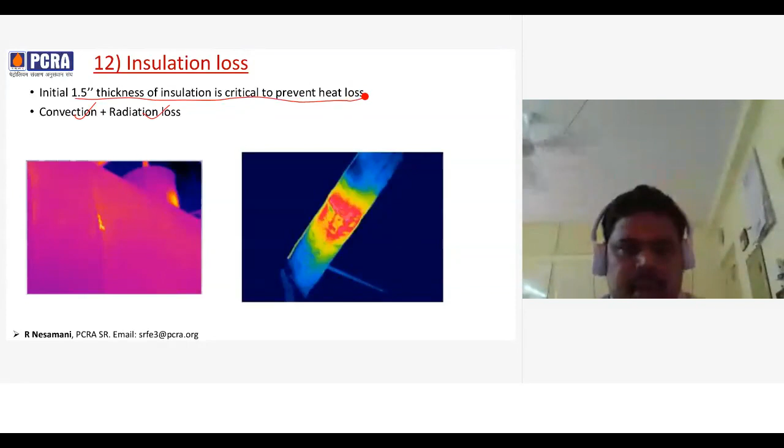So the 13th point is controlling valve passing losses. During the audit, we have observed recirculation valves - we have to observe whether recirculation valves are working properly or not.

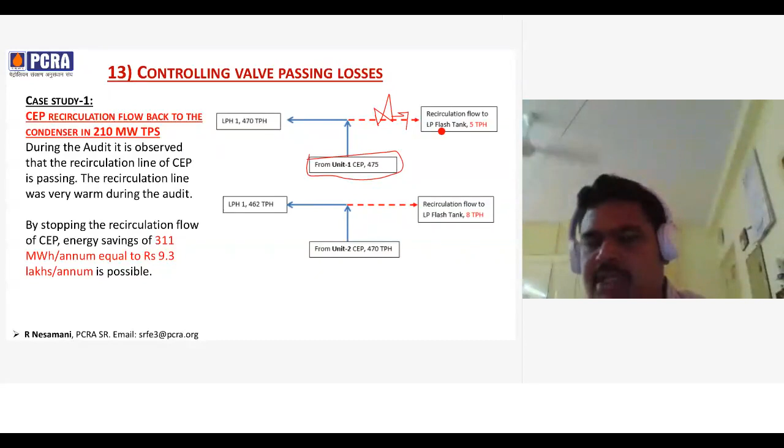This is a case study about a 210 megawatt thermal power plant, where the condensate extraction pump flow was 475, but the flow to the LP heater was only 470, meaning 5 tons was recirculated back to the LP flash tank. The valve was in closed condition, but still the valve was passing, so this leak was happening. If they arrest this valve passing - meaning we are giving input using a pump, and again wasting it in the form of passing - if they arrest this leakage, they can have a saving of almost 300 megawatt hours per annum of energy, equal to 9.3 lakhs per annum.

The second case study is about boiler feed pumps. That was also leaking - the recirculating flow was very high, 45 tons per hour. The valve was in closed condition, but still the valve was passing almost 45 tons. So we suggested rectifying this loss, thereby they can achieve almost 2.35 crores per annum.

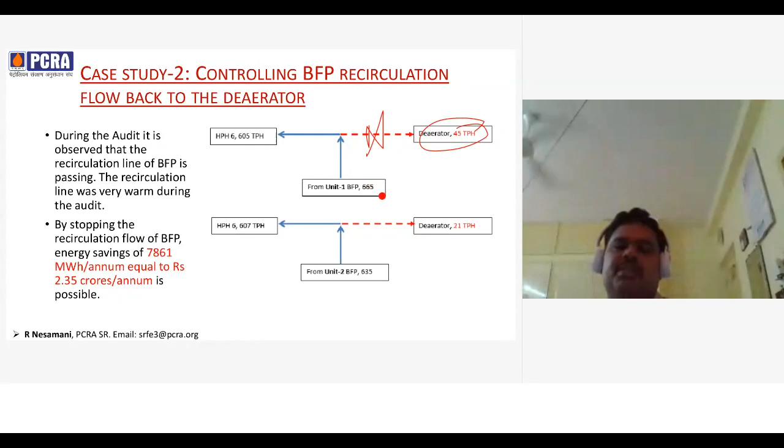If they rectify this recirculation loss, what will happen? The supplied flow will come down. In this case, only 605 was enough for the process, but they were supplying almost 665 tons, with 45 sent back. We all know that pump flow and speed, as well as power consumption, are proportional. If the flow comes down, the power consumption will also come down.

What is the suggestion? One thing is they have to rectify this passing recirculation valve, and why the recirculation happens. If you see in this case, BFP discharge was 170 bar, but the inlet was 16 bar. So this is a recirculation valve - this side has a very high pressure of 170, this side is 16 bar only. So the pressure drop is very high.

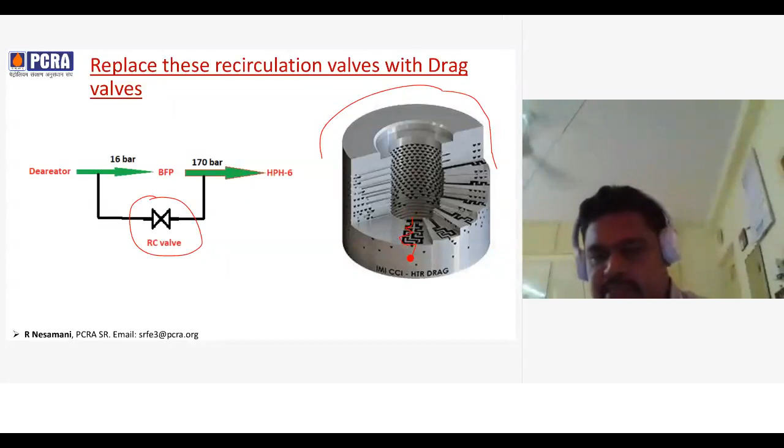This causes, over the years, the high pressure drop to damage this valve, causing a passing during normal operation. So it is suggested they can consider drag valves instead of normal flow control valves for this recirculation valve. In drag valves, the steam or water, whatever it may be, the pressure drop happens in various stages, small, 20% only maximum. This prevents the valve getting damaged easily, as well as it works for many years.

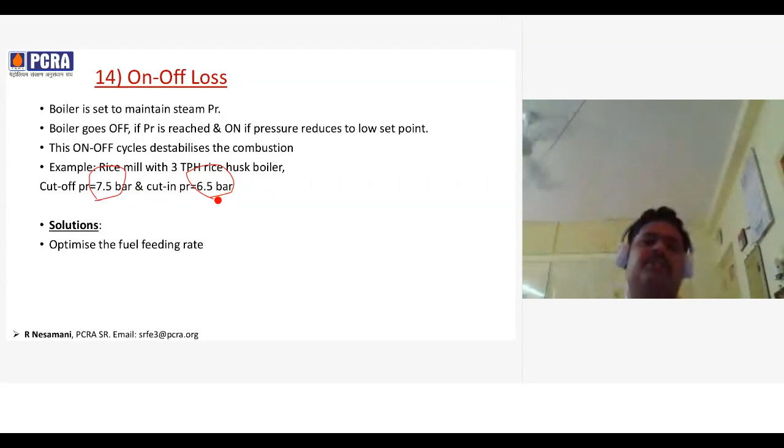So the 14th option is on-off losses. If you see in normal MSME units, rice mills and small boilers, 1 to 3 ton boilers were used for their process steam. They have a set point, like the steam pressure at 7.5, the boiler will go off. At 6.5, again it will start. So not only the boiler, the burner will go off, as well as the other fans - FD fan, PA fan, ID fan - everything will go off. When the 6.5 bar pressure is reached, again everything will start.

These frequent on-off cycles will destabilize the combustion, and the starting will consume a high amount of energy. This is a loss in the system. So what is the solution? They can optimize the feeding rate as per the steam consumption, as well as reduce this bandwidth, meaning it shall be reduced so that it will not go on-off frequently. Or a suitable burner control also will have a very good effect on this loss.

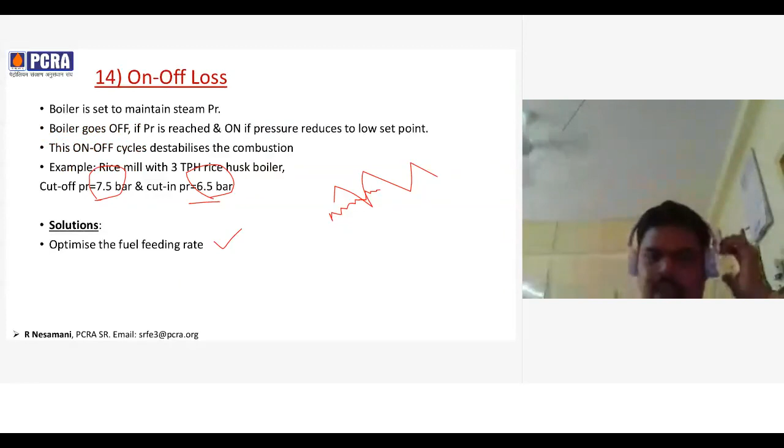The 15th suggestion is fuel switching. Whenever we find that some new fuel has come up - for example, in few states, GAIL India Limited has come up with natural gas - industries that were using LDO or HFO or other fuels can switch to natural gas. Like that, we have to think of the economics of the fuels and switch to the best fuel. This is one case study about a 210 megawatt thermal power plant where they have used HFO for starting as well as as a supplementary fuel with coal.

It was suggested to replace HFO with LDO because HFO was consuming auxiliary steam to maintain its viscosity. The auxiliary steam was continuously given to HFO to maintain its temperature and viscosity. So if we use LDO, this auxiliary steam consumption will go down drastically.

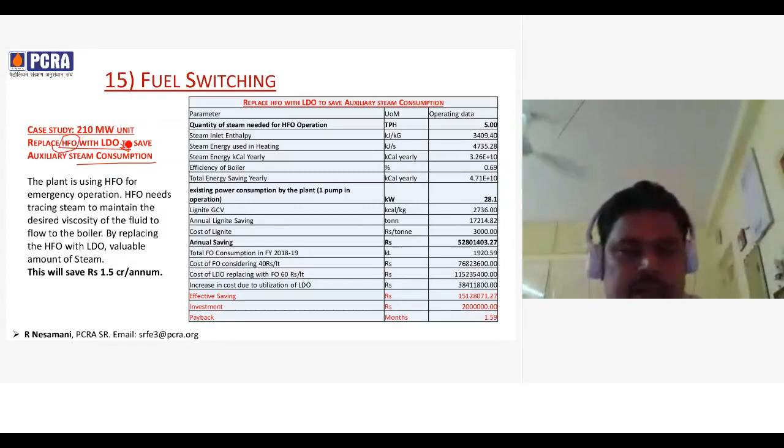This is a sample calculation. They were using almost 5 TPH of auxiliary steam continuously, at an enthalpy of 3000 kilojoules per kg. This auxiliary steam consumption will go down if they go for LDO, and other churning pumps they were using can also be switched off if they use LDO. Using this fuel switching, they can have a saving of almost 1.5 crores. The investment will be some 20 lakhs, so the payback will be less than 2 months.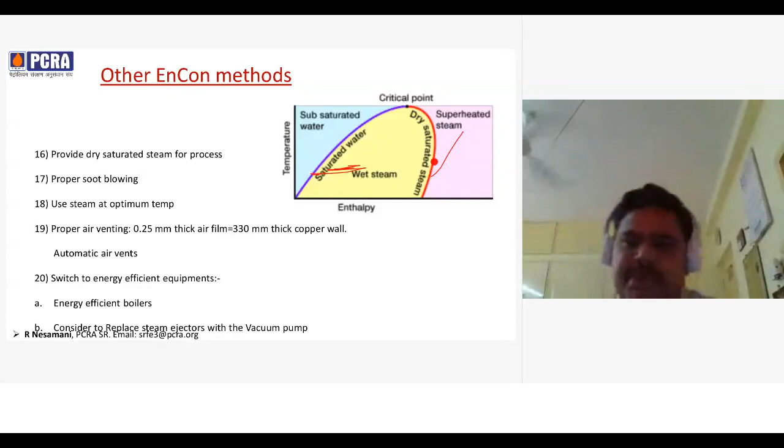As well as, if you give saturated steam, meaning normal saturated steam at this location, it will have a huge moisture content and will damage the pipeline. So it is better to give dry saturated steam, thereby the latent heat will be used for indirect heating, and it will have good heat transfer properties.

The 17th point is we have to go for proper soot blowing. The automatic soot blowing systems are there because if proper soot blowing is not done, then the furnace side will have a slagging problem. That slagging will reduce the heat transfer to the water and will have an effect on efficiency.

The 18th point is to use steam at the optimum temperature. Optimum pressure is also good, but it is not suggested to reduce the design pressure of the boiler. It is better to operate the boiler at its optimum design pressure, but we can go for reducing the optimum temperature. For example, let's assume at atmospheric pressure steam line, one process is given superheated steam at this temperature, but that temperature is not necessary for that process - we can reduce the temperature to this level. This temperature reduction will have a very good saving on energy efficiency.

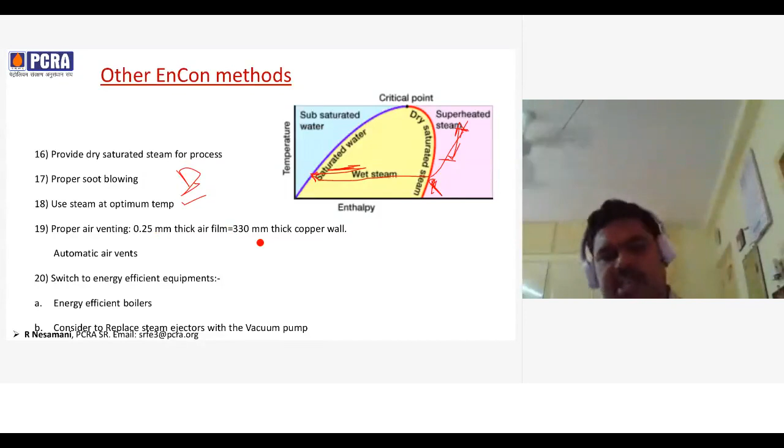The 19th point is we should use proper air venting. A 0.25 mm thick air film is equal to almost 330 mm of thick copper. It will prevent heat transfer in the tubes. So it is suggested to go for automatic air vent for maintaining the air vent ppm levels.

The last point is switching to energy efficient equipment. We can consider switching the boilers because I have seen that most MSME units have very old type boilers with an efficiency of only 40%. But nowadays boilers of almost 70% are available, so they can consider switching to this energy efficient boiler by replacing.

In power plants they can consider replacing steam ejectors with vacuum pumps for condenser vacuum maintenance. This can be taken up after proper evaluation.

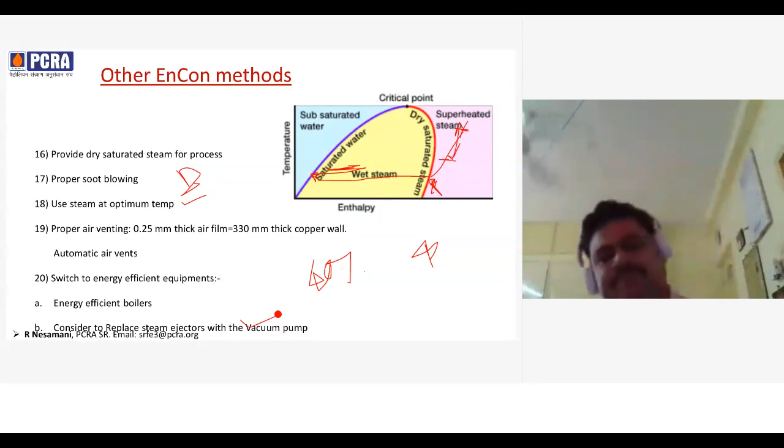So we have discussed these things like the approach, the steam balance diagram, boiler efficiency, the indirect method of calculation and its losses, and the factors affecting boiler efficiency. In action plans, we discussed how to control excess air, reduce flue gas temperature, the effect of APH leakage loss, how to remove unnecessary pressure drops, condensate recovery, flash steam recovery, blowdown loss, deaeration loss, steam leaks, and insulation. Like that, we have discussed almost 20 action plans.

If we do the energy audit of steam lines as per this procedure, we will surely find suitable applicable action plans from these 20 that can be implemented in your plant.

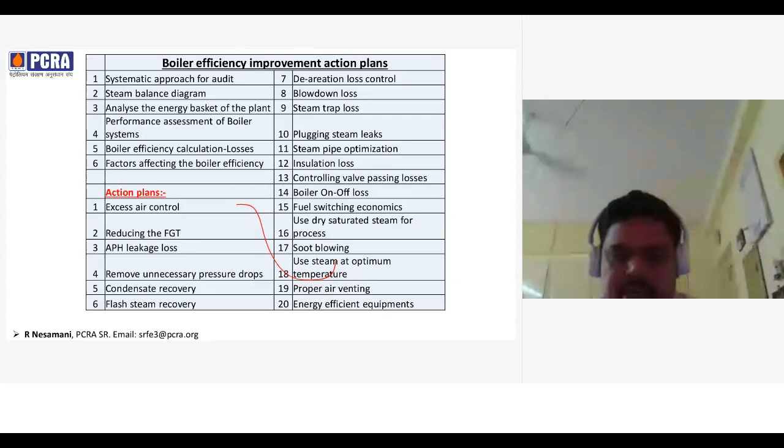After implementing a few applicable points, we have to again calculate the fuel savings using this formula. Surely efficiency will increase after implementing a few points. So for example, if 5 lakh per year is the fuel cost and efficiency has improved from 70 to 80%, then it will have a saving of almost 62,000 per year in fuel.

So this is the final conclusion. We have to analyze the energy consumption in the boiler and steam systems together. We have to measure and monitor the vital parameters continuously for optimized boiler operation, implement the applicable energy conservation tips which we have discussed, and evaluate and implement the latest technologies.

Finally, since most boilers run on fossil fuels, it is already damaging the earth through global warming and melting of glaciers. There are many problems happening on earth, so we have to take some actions, thereby we can reduce fuel consumption, and reducing fossil fuel consumption will save the earth.

What should be the CO2 percentage in output flue gas of a bagasse fired boiler? That is a case to case basis. He is asking about the optimum. We have to find the oxygen, and from that we can also convert to CO2. But my point is that we should not be thinking about CO2 in flue gas for finding excess air.

So whether GCV method of calculating efficiency is better, or NCV method? GCV considers the recovery of heat lost in water vapor formation, giving that back, but NCV doesn't consider that. Instead of thinking about which is better, we have to refer to the OEM, whatever calculation of boiler efficiency he has considered. Then whatever we calculate, we can compare with the design efficiency to know the deviation. Otherwise, if we calculate on a GCV basis we get one percentage, but if the PG test values are calculated on an NCV basis, it will give some other percentage.

One more question: what is the quality of steam required in a tea drying process? It depends on whether it is direct heating or indirect heating. If it is direct heating, it is better to go for superheated steam. If it is indirect heating, then dry saturated steam is good.

Is there any practical, simple method to measure the direct steam injection quantity used to heat water in a tank, other than using the formula? If they know the flow velocity and diameter, they can find it using the formula Q equals A times V. They can try that, but they should know the velocity, and for velocity calculation they again have to use a pitot tube and similar instruments.

Next question: what is the frequency of inspection of steam traps, and how much can we save by doing it? Inspection frequency can be set for every 6 months, or whenever you shut down and restart the plant. During starting, because of dust and other foreign particles, traps get damaged and blockages start. So it's better to inspect every 6 months in continuous operation, or once after a shutdown. It is suggested that you can save almost 20% of steam otherwise lost in steam traps; you can calculate this based on your boiler capacity and enthalpy of the steam.

Next question: suppliers of condensing economizers. Yes, there are some suppliers, one being TSPL - Transparent Energy Systems Private Limited. They have compact boilers of various sizes, and the boiler itself includes the condensing economizer as a package. They claim the NCV basis efficiency is almost 100%, because they achieve a flue gas temperature of 45 degrees Celsius, almost equal to atmospheric temperature, recovering all the wasted heat. They can have an evaluation done, but one thing to keep in mind is that the material of construction of the condensing economizer shall be selected as per the condensate flue gas quality.

Next question: what is the optimum load level of a boiler, and is it the same for all boilers? For small boilers, it is three-fourths of capacity, approximately 75%. But for big boilers, loading can be improved to 75 to 90%.

What will happen to efficiency if we decrease the reheater temperature by 10 degrees Celsius? Reheater means he is talking about hot reheat, I think. Yes, surely it will have an effect on heat rate. But for that, they have to refer to their PG test graphs.

And other than that, we need an RH value, relative humidity of the air at that location, and thermometers for calculating the temperatures. These are the instruments we use normally.

For steam quality, he is talking about the dryness fraction. In fact, in India, only one party has claimed that they have an instrument for calculating the dryness fraction, but that too is not sure, it is also an evaluation basis using a formula—it will not give an exact dryness percentage.

But the dryness can be approximately calculated using its steam pressure and temperature. If you see the steam tables, it will give a dryness fraction. So these are the ways, sir.

Next question is, do we have any portable flow measurement devices for measuring the steam flow in a live steam line? Portable means, no, we don't have. Actually, normally a USM flow meter can be used only for liquid flow, meaning water flows.

For gas flows, there will be some orifice meter that can be used for gas, and using pressure drops, it will find the flow of steam. But a portable orifice meter, I am not aware of. We have to install the orifice meter in the pipeline.

Next question is, name some good suppliers for measuring steam quantity outlet from the boiler. I suggest that he can mail me so that I'll reply back.

Okay sir, one more question. What is the minimum temperature of wastewater that goes to ETP? Can it be saved using a heat exchanger? It is not suggested to use a heat exchanger in wastewater because wastewater will have impurities.

Initially it will have very good heat transfer properties if you install a new heat exchanger, but after a while, the impurities will form a scale on the surfaces. Thereby, the heat transfer will go down, so you will not get much heat transfer, and the payback period will increase. So it is not suggested to use a heat exchanger.